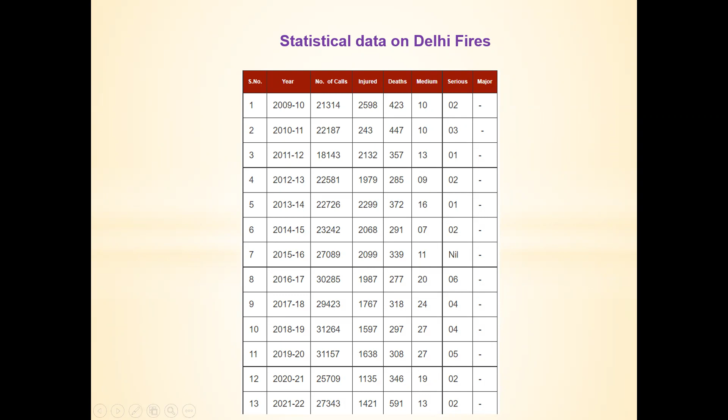As per NFPA, the National Fire Protection Association, a global self-funded non-profit organization established in 1896 devoted to eliminating death, injury, property and economic losses due to fire, electrical and related hazards, the top fire causes identified have been those related to cooking, heating apparatus, smoking, and electrical issues.

Whatever may be the cause of fire, the cost of a fire accident is loss of life, damage to property, and loss of goodwill of the building because it will earn a bad reputation. At the same time, it also causes environmental pollution.

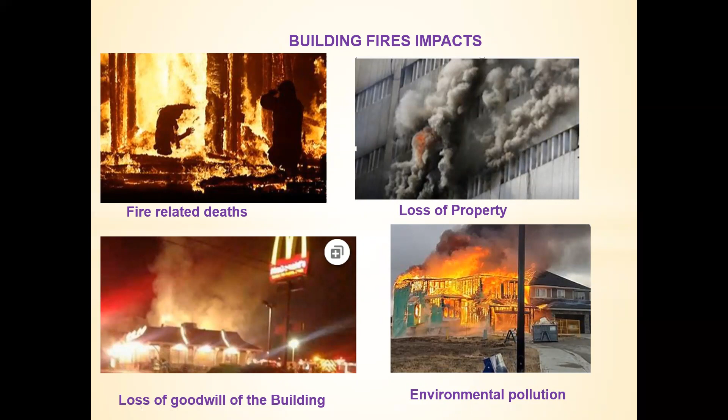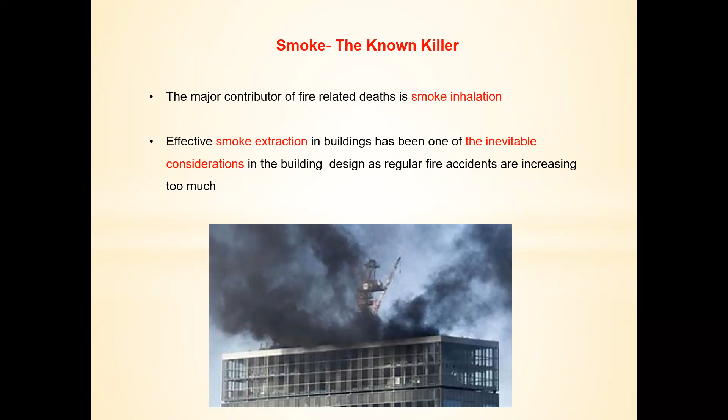It's a well-known fact by now that smoke is a major killer in most fire situations. So smoke extraction is an inevitable part of building design.

So what is so dangerous about smoke in building fires? Smoke kills, that is well known, but the reason why is much less understood. Data reveals that 75% of all fire deaths are caused by smoke inhalation and not the fire.

Approximately 57% of fire deaths have been seen to happen outside the room of fire origin. And around 47% of fire survivors reported that they could not see beyond 12 feet. Why? Because thick smoke reduces visibility, making escape of occupants very slow and hazardous.

The typical speed of smoke is around 1 to 2 meters per second, much faster than the escape speed of an occupant. So when smoke reaches a dead end, vertically or horizontally, it will drop down or be drawn back towards the fire. This confuses occupants and causes them to move towards the fire.

So a properly designed and managed smoke control system is a very important part of building design.

We all know we cannot inhale smoke because of its noxious effects. We know it smells bad, and that's all about it. Fact is, in addition to being chemically toxic, hot smoke can damage skin, eyes, and lungs, leading to disablement. It can obscure vision, hindering the escape of occupants.

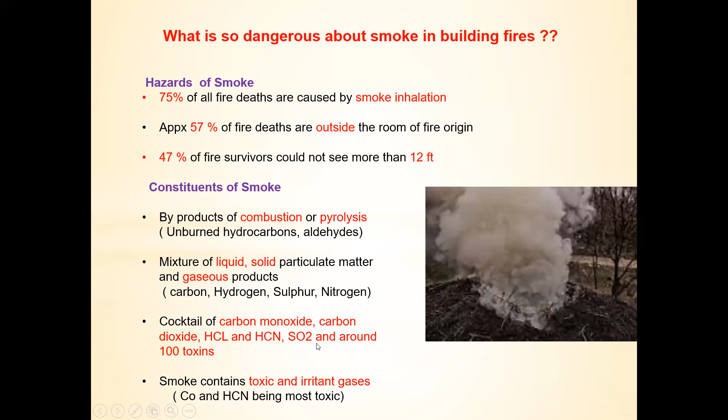What are the other hazards of dangerous smoke? It generates high temperature, and oxygen levels are reduced, causing suffocation to the occupants.

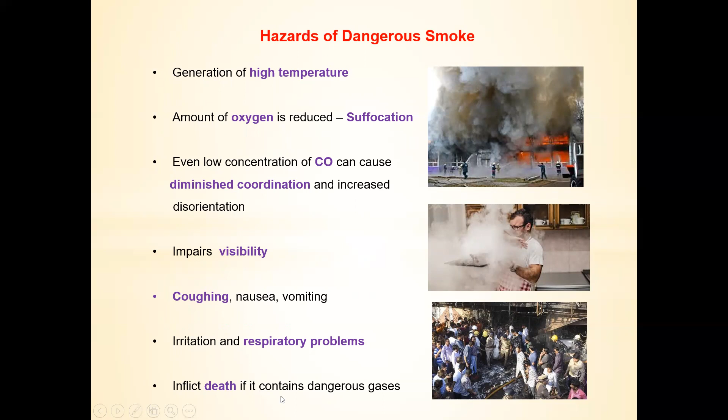Even low concentrations of carbon monoxide in an area can cause imbalance, diminished coordination, and increased disorientation. It impairs visibility, can cause coughing, nausea, and vomiting. It causes irritation and respiratory problems, and can even inflict death if it contains dangerous gases.

So now, what are the applicable and regulatory codes for smoke control and management? The most prominent is IBC, the International Building Code. Then we have NFPA 101.

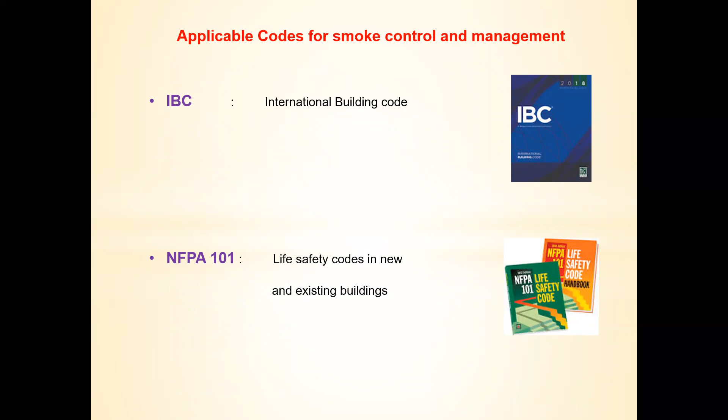NFPA 101 gives the regulations for new and existing buildings. Then we have NFPA 92A, the standard which defines the smoke control system through barriers or compartmentation and by maintaining pressure differentials.

The purpose of these is basically to keep egress routes like stairwells, lift lobbies, and refuge areas free of smoke, and to prevent the travel of smoke from the smoke zone to other adjacent areas.

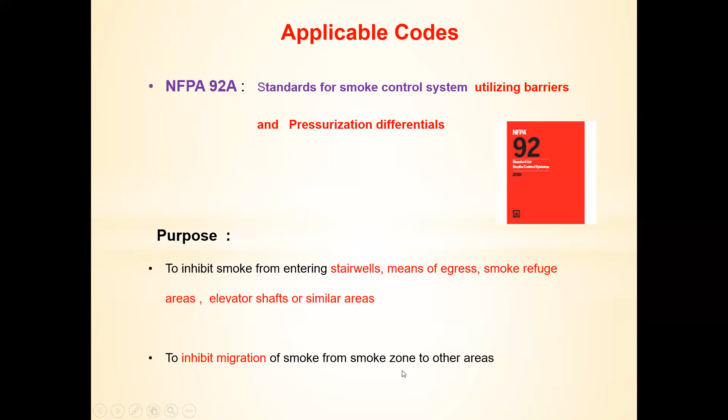There is another standard, NFPA 92B, which is a standard for smoke management systems in malls, atria, and large spaces. The purpose of this standard is to maintain a tenable environment in the means of egress from large volume building spaces. What is meant by tenable environment?

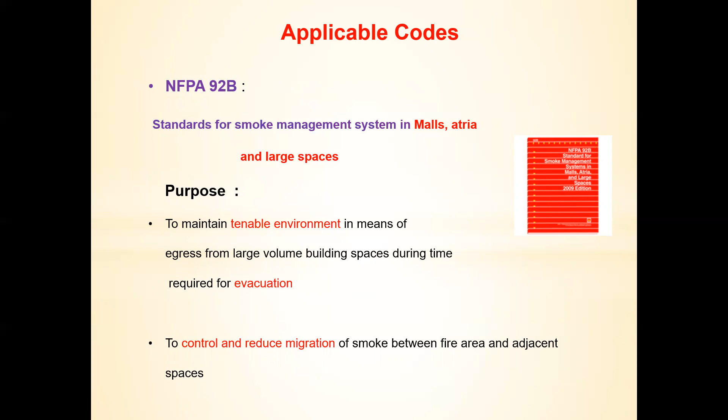Tenable means that the conditions in terms of temperature and concentration of contaminants are within permissible limits and are not life-threatening. Another purpose of the guidelines from NFPA 92B is to control and reduce migration within the affected fire zone and prevent smoke transfer between the fire area and adjacent spaces.

If we compare NFPA 92A and 92B, the airflow patterns are opposite. While 92A seeks to move outside air into enclosed spaces to keep them pressurized and free of smoke, they also have to provide exhaust relief, because constant addition of air can cause excessive pressurization, causing problems in door openings.

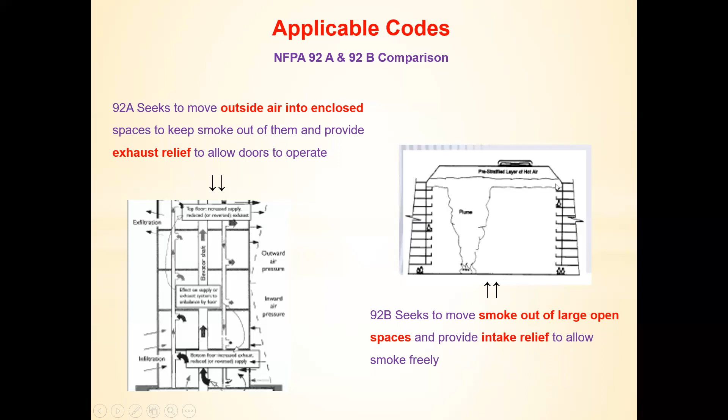92B seeks to move smoke out of large open spaces. So it takes care of exhaust and provides intake relief to allow the smoke to be released freely. Here they're talking of introducing makeup air, which mixes with the contaminants, and the smoke can then be eliminated from that space.

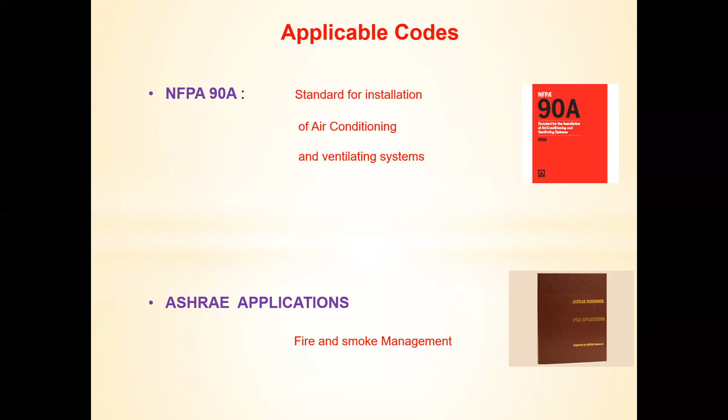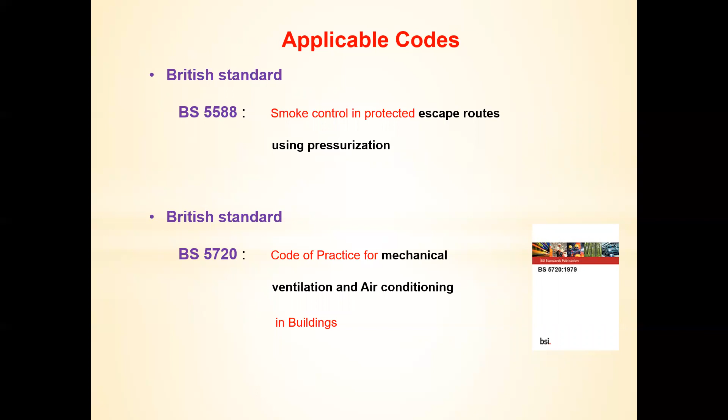Then we have the standard NFPA 90A, which is a standard for installation of air conditioning and ventilation systems. ASHRAE applications, chapter 54, also addresses fire and smoke management. We have British standard BS 5588, which defines smoke control in protected escape routes using pressurization. British standard BS 5720 is a code of practice for mechanical ventilation and air conditioning in buildings.

Then in India, we have NBC 2016, part 4 of which defines fire and life safety. This standard was first published in 1970, and based on experiences—because every fire incident teaches a new lesson—it has been revised over the years in 1983, 1997, 2005, 2015, and the latest one is NBC 2016.

In any high-rise building, stairs are typically the main route for egress of occupants during a fire. So it is imperative for the exit stairs to be free of smoke so that occupants can escape safely.

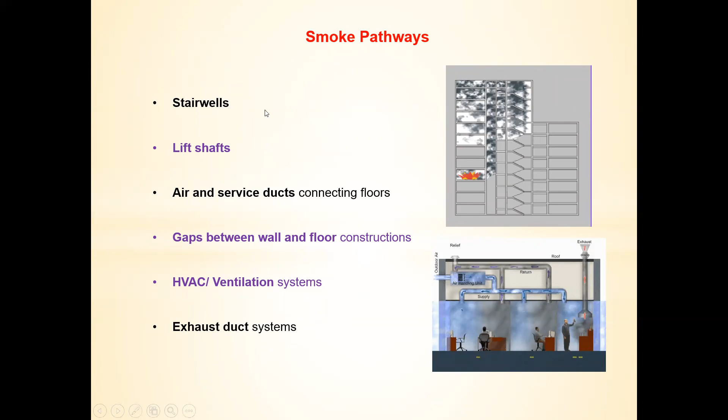Now, how does fire travel in a building? What are the pathways of smoke in a building? These are your stairwells, lift shafts, and also the structure between wall and floor construction, because wall and floor construction is also permeable for smoke to get transferred. Then we have mechanical HVAC and ventilation systems, and exhaust duct systems. All these places provide pathways for smoke to travel.

What are the objectives of smoke extraction? The most important being life safety, and to reduce damage caused to property. Firefighters also, while controlling the fire, need to access the building, so smoke removal is important from that perspective also.

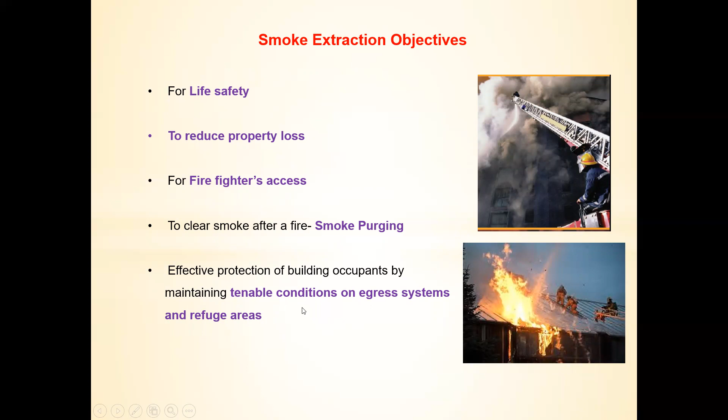After the fire has happened, smoke purging is also required, and for that purpose the smoke management systems are required. The objective of smoke extraction is also to maintain tenable conditions in egress systems and refuge areas, so that occupants can escape safely.

There are various methods of smoke management, classified broadly into two parts: active and passive methods. The passive method uses building construction material to limit the spread of smoke in a structure by maintaining compartmentation, creating fire-rated walls, barriers, fire dampers, smoke vents, and shafts. These use the building systems.

Then we have active methods, which use mechanical equipment to control the spread of smoke in a structure. These are further classified into different forms like exhaust, dilution, airflow, and pressurization systems, among others. The subject is vast, but in this session we'll concentrate only on the last point, D, of the active methods, which is the pressurization system.

Now what is the requirement of pressurization? The International Building Code recognizes three specific means to provide smoke control. One is natural ventilation, where certain openings can be left, as NBC 2016 has also said—you can provide a 0.5 square meter opening in staircases which are exposed to the outside.

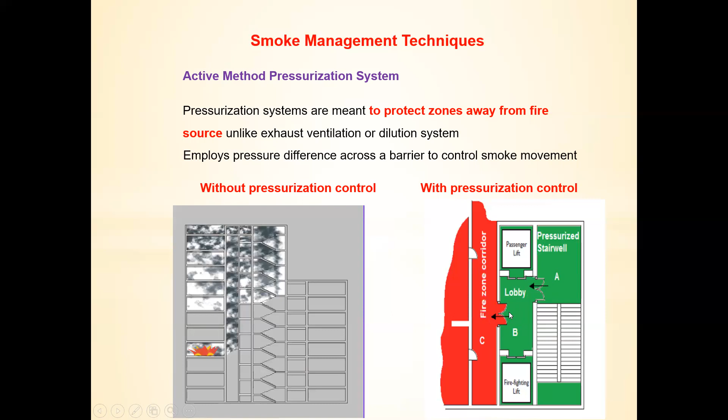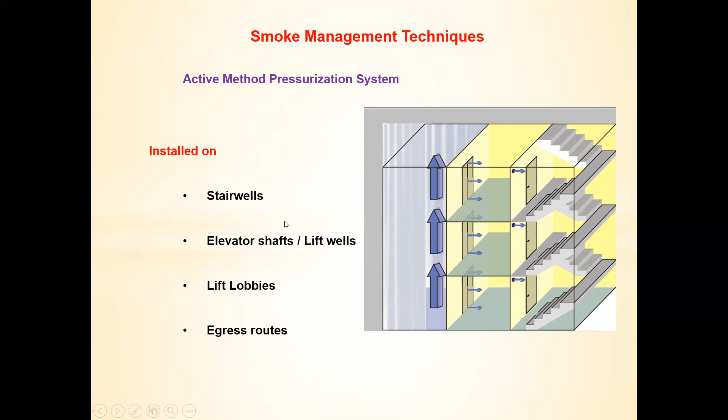This active method pressurization system is installed on stairwells, it is installed on elevator shafts or lift wells, it is installed on lift lobbies and the egress routes.

What are the specific needs of staircase pressurization? Basically to protect life, to reduce damage to property, to inhibit migration of smoke to stairwells and areas of refuge and similar egress areas, to maintain a tenable environment in the refuge areas and egress routes, and to facilitate fire and rescue operation after the fire has happened.

You have to improve visibility to purge out the smoke and for protecting the occupants. So it will ease out the work of the firefighting crew.

This is the typical staircase pressurization shaft diagram. In case of fire, staircases will be the normal route. The people will be escaping from their respective floors to the main outside door.

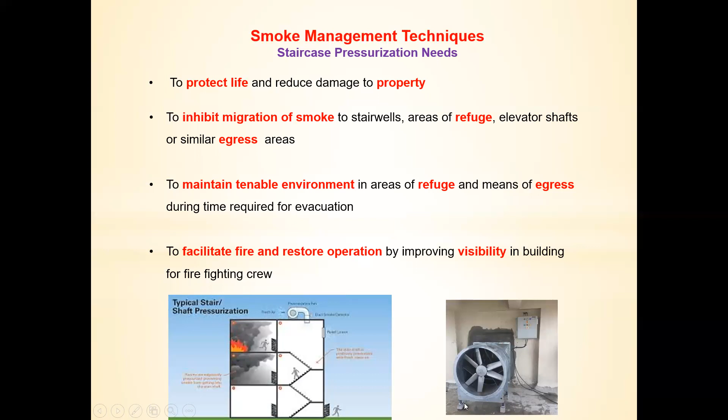This figure shows the staircase pressurization fan, which is normally installed on top of the building, on the terraces. This is a blow-up diagram.

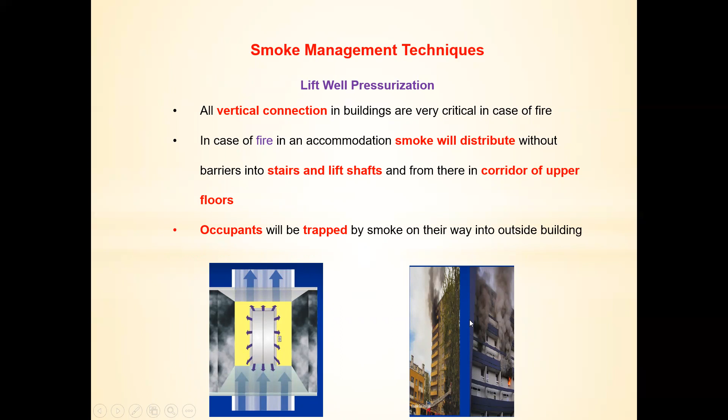The other one is lift well pressurization, because the lift well is a vertical connection. In case of fire, it is very critical because otherwise, if it is not pressurized, smoke will distribute through the stairs and the lift shafts and in the corridors of the upper floors, and the occupants will be trapped by the smoke on their way outside the building.

The NBC says that if the lift lobby is not enclosed in certain buildings, then the lift well needs to be pressurized. Otherwise, the latest code, NBC 2016, has not mandated lift well pressurization. We can do away with this if the lift lobbies are enclosed. Lift well pressurization is an alternative to enclosed lift lobbies.

If lift well pressurization is done, it is maintained at 50 mm static pressure and it prevents smoke flow through lift shafts. But normally, for additional safety in our designs, we provide both the lift well and lift lobby pressurization, with the wells kept at 50 mm static pressure and the lobbies maintained at around 25 to 30 mm static pressure.

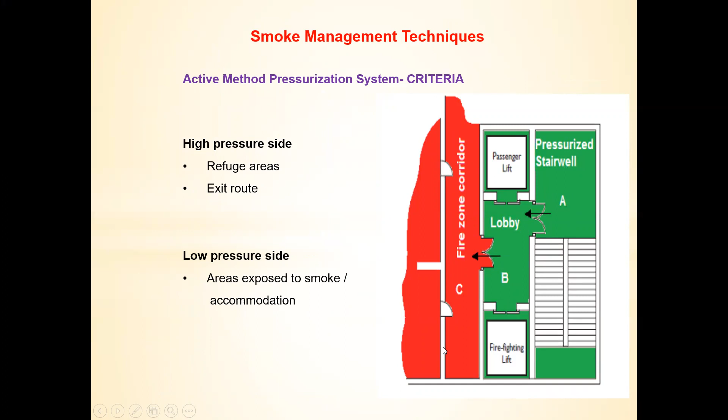So how is this pressurization created? There are two sides: one is the high pressure side and one is the low pressure side. High pressure is maintained in the refuge areas or exit routes like the stairwells and the lobbies, and the low pressure side is the affected accommodation side or the fire zone corridor.

Now, what are the principles, how is it implemented? This system uses mechanical fans to produce positive pressure on the stairwells, on the lift lobbies, and on the lift wells. For example, if we say A, B, C, the pressure gradient which will be maintained will be A greater than B greater than C.

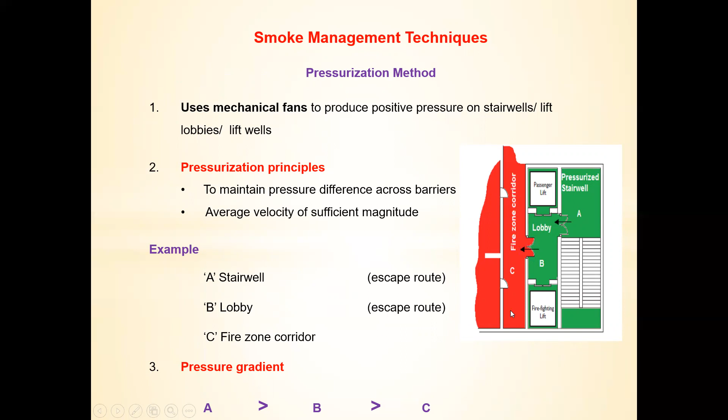The idea being, when these doors are open, the air should flow from A to B to C and not vice versa. This will control the flow of smoke and migration of smoke to the exit routes.

So in the door close scenario, what happens when both these doors are closed? Excessive pressure in A and B will prevent smoke migration from zone C to these places. But at the same time, the caution is that the pressure maintained should not be so high that door opening becomes a problem during egress.

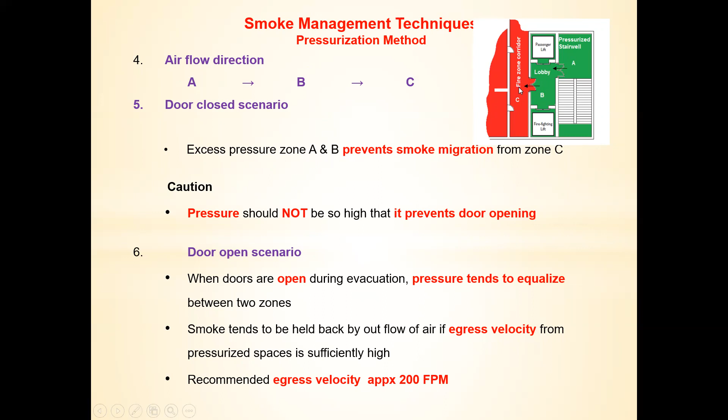The second situation is when these doors are opened. Suppose the door between the affected fire zone, that is the corridor or accommodation side, and the lift lobby is opened. Then the pressure tends to equalize between the two zones. So in the design, provision is kept for this condition: when the door opens, there should be sufficient air quantity so that air rushes across the door at a specified egress velocity of around 1 meter per second, stipulated by standards, or around 200 fpm, and this will prevent smoke from migrating from C to B even when the door is open.

Now there are certain stipulations of NBC 2016 regarding ventilation or pressurization requirements of staircases with respect to the location of the staircase in the building and also based on building heights. For internal staircases with an external exposed wall, if the building height is less than 15 meters, the staircase can be naturally ventilated. This does not apply for residential buildings. The louvered area specified is 0.5 square meter.

For buildings with height between 15 and 30 meters, the stipulation is either the staircase should be naturally ventilated or it can be pressurized. For buildings more than 30 meters, it has to be cross ventilated or pressurized. Cross ventilation means the staircase needs louvers into opposite side walls or two adjacent walls, or it should be ventilated across the corridor.

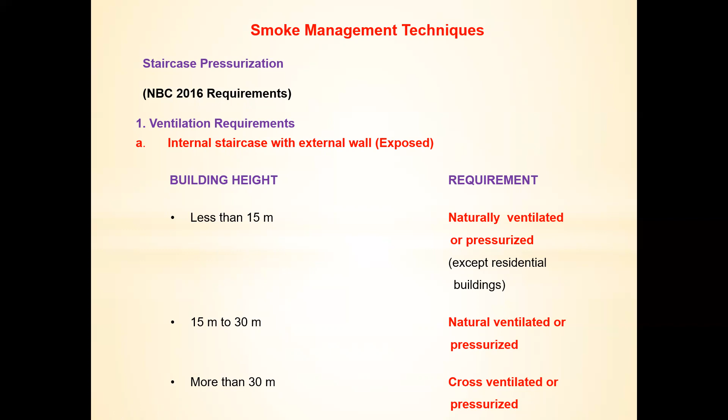The second option is the internal staircase, which is not adjacent to an external wall. For such staircases, for building height less than 15 meters, it's required to be pressurized, and even for higher buildings between 15 and 30 meters or more than 30 meters, the regulations necessitate pressurization. Only residential buildings are exempted from the pressurization requirements.

Now, what about the pressurization levels? As per the codes, the pressurization level in the staircase should be not less than 50 Pascal between the exit staircase and the accommodation. When all the doors are closed, the pressure should be 50 Pascal.

And if there is a smoke stop lobby, an adjacent lobby or lift lobby, then the pressure at the exit staircase should be higher than the lift lobby. So as we saw in the previous slides, if it is 50 Pascal here, it is around 25 to 30 Pascal there. At the same time, the force required to open any door against the combined resistance of pressurizing air and automatic door closing mechanism shall not exceed 110 Newton at the door handle. This is a typical requirement so there is no problem due to excessive pressurization in opening of the doors.

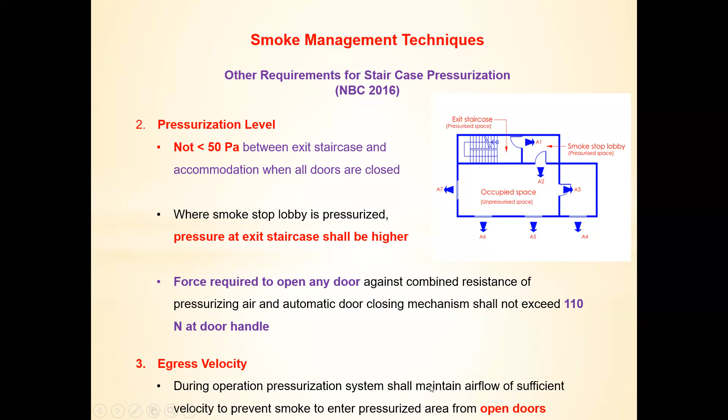Then the third point is the egress velocity. When the doors are open, the pressurization system should provide adequate airflow to enable an adequate air velocity of 1 meter per second from the open door. This flow velocity shall be attained when a combination of two doors from any two successive stories and the main discharge door are open. So NBC says that when designing the pressurization system, it should consider two doors and one main discharge door. But certain standards even accept one door considered as the open door, and the main discharge door in any case has to be open for escape of the occupants. The egress velocity minimum should not be less than 1 meter per second.

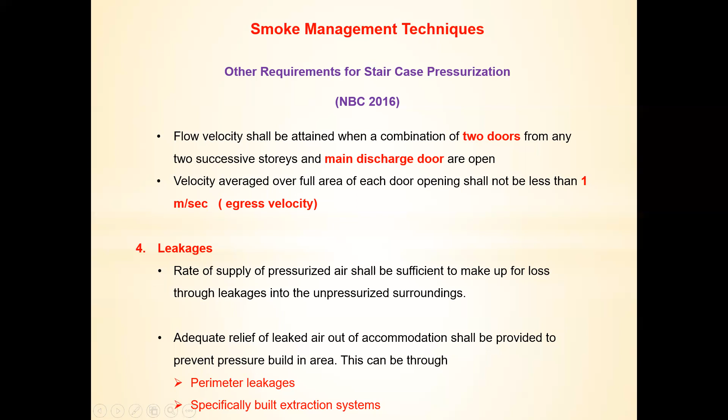Then, as I said, there are leakages through the structural elements in the building. The pressurization air should be sufficient to make up for the loss of air through leakages into unpressurized areas. Now where are these leakages happening? These can be around the perimeter. If we consider a room, there are doors and windows, so there are leakages across doors and windows, and also across the building structure: the walls, the ceilings, the floors. And if there are special extraction systems, those also have to be taken into account.

Then in the design, we have to decide the number and distribution of injection points. If it's a multi-storied building, at which points we need to inject the pressurization air. At the same time, the pressurization system, since it operates during an emergency, has to be fed through a reliable emergency supply. It is a requirement that the supply has to be drawn directly from the outdoor space. Sometimes people tend to consider fresh air coming from basements, but that is not acceptable.

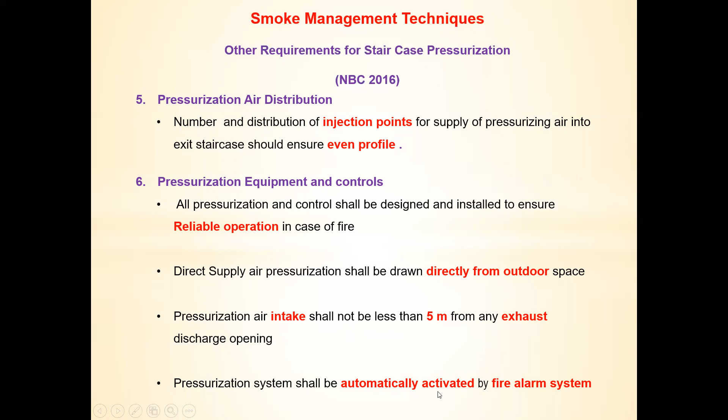As per the regulations, the air has to be drawn directly from the ambient, and the pressure air intake shall not be less than 5 meters from any exhaust discharge opening. The pressurization system shall be automatically activated by the fire alarm system.

As per NFPA 92A, it also stipulates the pressures depending on the ceiling height in sprinklered or non-sprinklered buildings. For a sprinklered building, for any ceiling height, the design pressure difference should be minimum 12.5 Pascal. For a non-sprinklered building with a ceiling height of 9 feet, you need to design for 25 Pascal static pressure. For a non-sprinklered building of 15 feet height, the design pressure difference should be 35 Pascal. And for a high-rise building which is not sprinklered, you still need to maintain a higher pressure of 45 Pascal. So the minimum pressure value in a sprinklered building is 12.5 Pascal.

Maximum pressure value which is allowed is 112 Pascal, because beyond that the door openings can be a problem. Generally the pressure is around 88 Pascal, and door opening force is specified to be 30 pounds.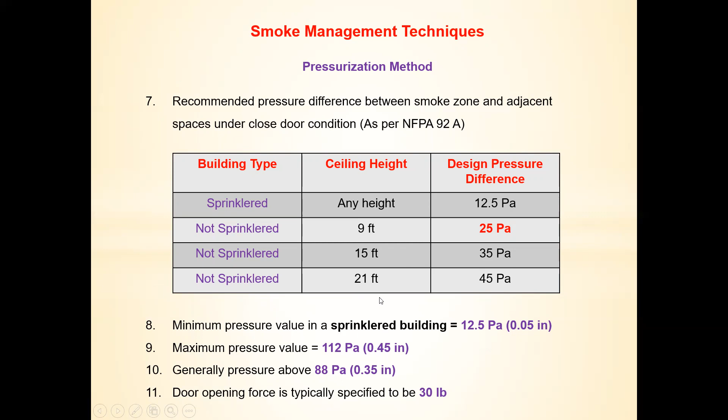Now, what are the system components of the staircase pressurization system? First, we have to decide the supply air quantity, the air which is to be injected into the area which is to be protected. Then we have to provide for the relief air mechanism to avoid or release overpressure when the doors are closed. System components also include the supply fans, the distribution system like ducting, grills, vents, and for the relief mechanism, automatic air release vents or dampers. Then we have the automatic control systems which will actuate the pressurization system, including fire alarms, smoke detectors, and safety switches.

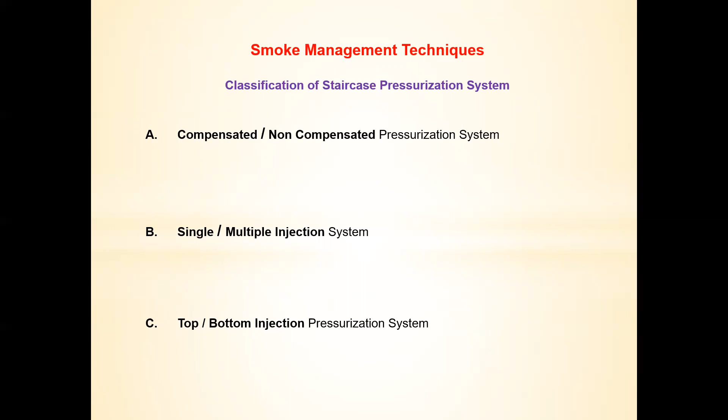There is also classification of staircase pressurization systems. They can be classified as compensated or non-compensated pressurization systems, single or multiple injection systems, and top or bottom injection pressurization systems.

A compensated system is the type of system which can adjust to any number or combination of door openings. So as we are assuming one or two door openings, in a compensated system, any number of doors, if they are open in the building, the system should be able to pour in that extra air to maintain the pressure differentials. It works by modulating the airflow, and at the same time, if excessive pressure is built up, it will relieve that from the stairwell.

But the thing is, this system is more complex and costly. It has more components like sensors, relief dampers, VFDs, and certain control sequences have to be worked out for how these will be operated optimally.

The non-compensated systems are the normal systems used in buildings. They comprise a single speed fan, which is a constant volume fan. Here we decide how many doors will be designed as open. So the level of pressurization depends on the number of doors open, because if the door opens, the pressure in the stairwell will drop, whereas if the door closes, pressure in the staircase will rise.

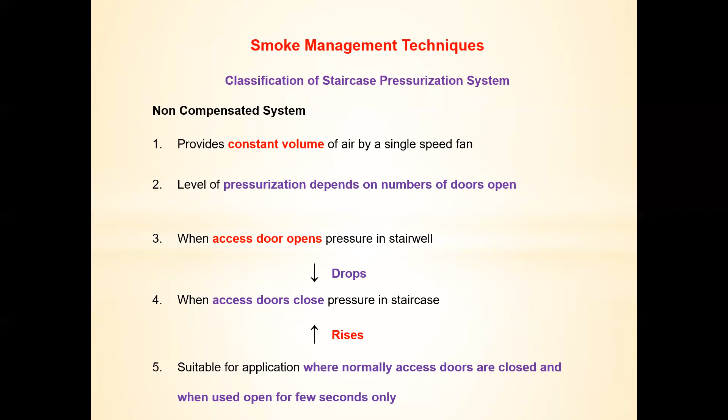This type of system is more applicable for situations where the access doors are normally closed, and whenever used, are open for only a few seconds. Normal office high-rise buildings also experience the same situation.

If the door is opened at the upper floor only, the air is going to leak out into that particular floor, and the balance areas will remain unpressurized. Loss of pressurization will happen immediately at the access doors farther from the injection point. The lower floors will not receive the pressurization, and the most common injection point is the top of the building, where the fan is installed on the terrace.

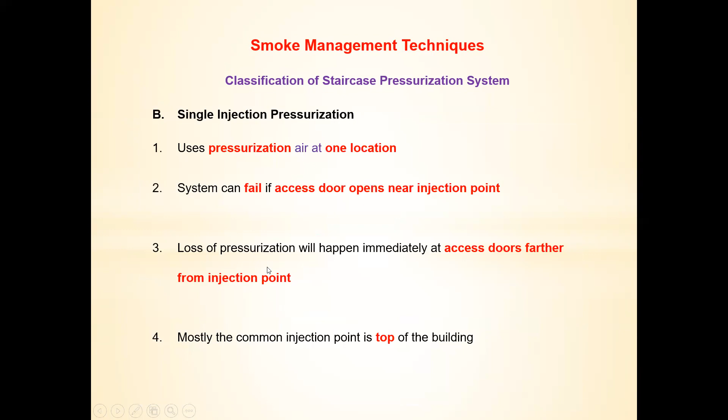Then we have the multiple injection pressurization system, which supplies air from more than one location. We need to have a vertical duct, and the air is injected at different levels. It employs either multiple fans, where you can have a separate fan for one, two, or three floors, or a single fan connected through a ducted arrangement to the multiple outlets.

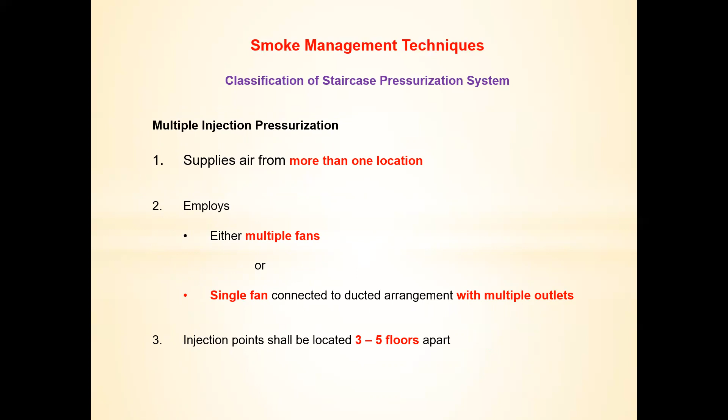Normally acceptable practice is to inject the pressurization air after every three floors, with a maximum of five floors. But in normal designs, we recommend that when laying the duct, we provide the pressurization at every landing.

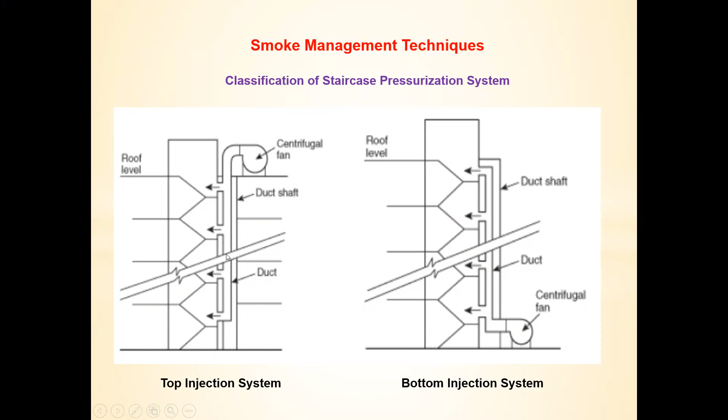Based on the location of the pressurization fan, the pressurization system is classified as the top injection system or the bottom injection system. What is the difference between the top and bottom injection, and what are their merits and demerits? In the top injection system, the fan is at the top of the stairs and occupies minimum footprint.

It will not block the premium space. But the drawback is that the highest pressure will be at the top of the stair and lower pressure at the bottom. Security is also a concern because normally the fans will be in the open.

In the bottom injection system, the fan is at the bottom of the stair and it takes up valuable ground space. As we go up the floors, the pressurization level will be reducing at the upper floors, with higher pressure at the bottom. Security is relatively less of an issue.

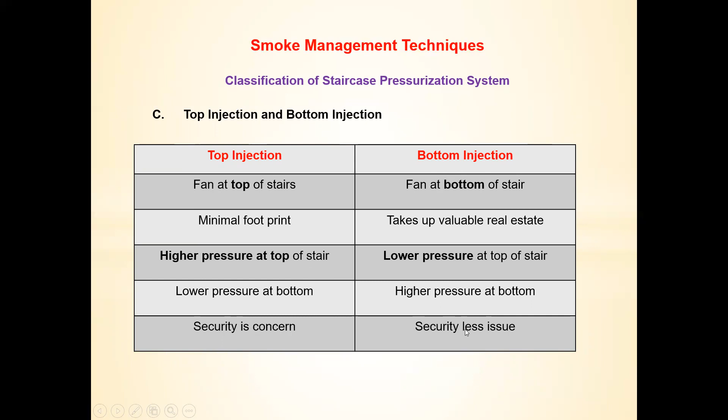Now, how do we go about designing a staircase pressurization system? We need to consider points like: supply fan options, where to locate the fan, how to select the fan drive, how the pressurization fan will be activated, what the distribution arrangement of the pressurization air will be, and what the specification of the ductwork will be.

We also need to design for pressure relief venting, determine the design calculations and design criteria, and understand how the system works. Documentation must be kept handy with the building at all times, since regular fire drills and inspections are an important part of building maintenance. One needs to maintain the basis of design and documentation.

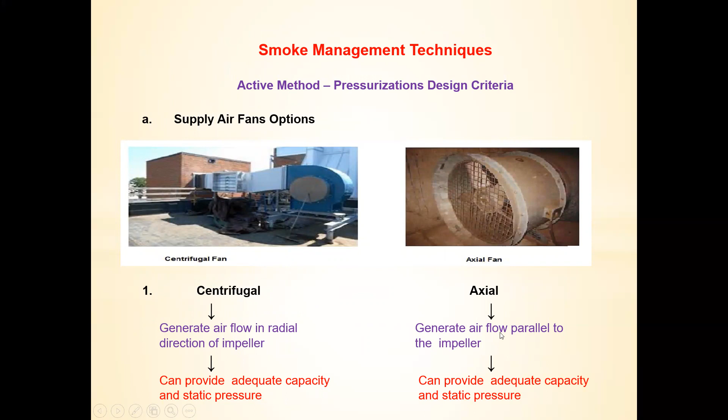Coming to the first point, we have two options for supply air fans: the centrifugal fan or the axial fan. In a centrifugal fan, the airflow is in the radial direction of the impeller, and it can provide adequate capacity, airflow, and generate adequate static pressure too. In axial fans, airflow is generated parallel to the impeller, and this fan can also provide adequate capacity and airflow at the desired static pressures.

So which is preferred, a centrifugal fan or an axial fan? The axial fan is preferred because of its characteristic curves. Axial fans have relatively flat pressure curves, so with varying flows, like when doors open or close, they respond quickly without changing the airflow capacity and without major pressure fluctuations. They are also easy to install, occupy less space, and are usually less costly.

But the drawbacks are that they are affected by wind pressure and may require wind shields at the air intake, particularly when wall mounted. However, since fans for staircases are normally mounted on the roof, they are generally mounted with the axis of the impeller perpendicular to the direction of the wind, so the problem of wind pressure is less severe.

Regarding fan location, whether top or ground, the top location is preferred because the ground level will have the single main entry or exit door, which will be open during a fire. If the pressurization fan location is near that door, it can be disturbed by movement of people due to fire personnel entry or refuge escape operations, which will cause short circuiting.

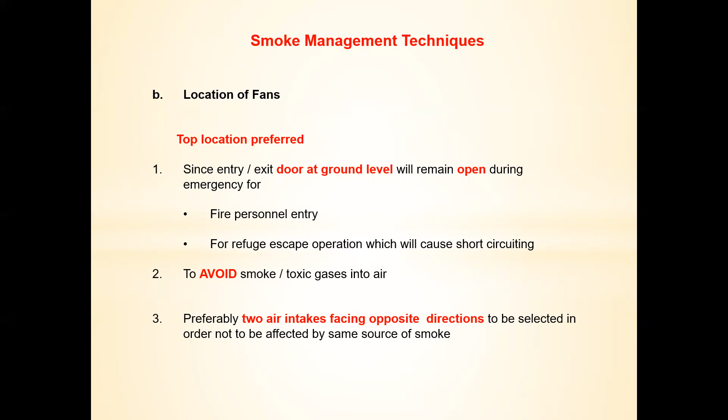If a fire zone happens to be nearby, we need to avoid smoke and toxic gases entering the air supply. So it is preferable to locate the fan on the terrace at the top. Regulations suggest using two fans with air intakes on the terrace facing opposite directions, so that if there is a fire at the top, the pressurization air being sucked by that fan should not bring in smoke—this is sensed by a smoke detector installed in the system. As per the norms, each air intake shall be protected through a smoke control damper, so that if one damper closes due to smoke contamination, the other air intake supplies air without interruption.

And each inlet shall be suitable for providing the full capacity.

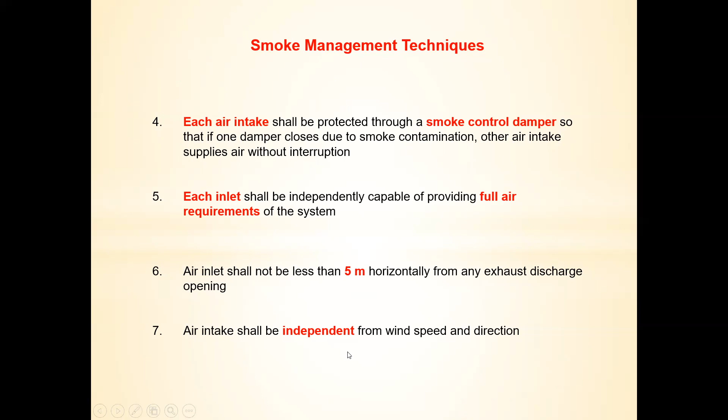It should be designed for the total pressurization quantity and not 50-50. The air inlet shall also not be less than 5 meters away from any exhaust discharge opening. And air intake shall be independent, not influenced by wind speed and direction.

How we select the fan drives: the smoke control fans are required to operate below their rated horsepower, and they should be selected with a service factor of 1.15. They should be designed to run in the stable portion of the fan curve so that the air quantity is not modulated much due to the pressure differentials when the doors open. They should be suitable for operation at elevated temperatures, which is why it has been specified that the fans should be able to withstand 250 degrees centigrade for more than 2 hours.

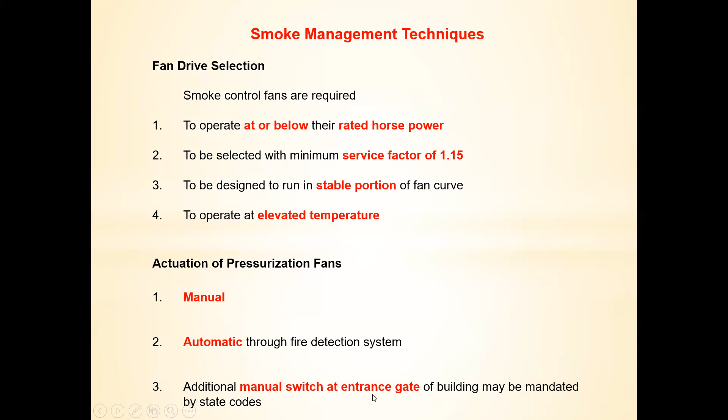How will the pressurization fans be actuated? The actuation can be manual or automatic through the fire detection system. Additionally, certain state codes also mandate that there should be a manual switch at the entrance gate so that people don't have to go in to switch on the system.

How will the distribution arrangement, the ducting arrangement, be designed? It can be a single fan serving a vertical duct, providing horizontal branches to each floor, or it can be multiple fans serving multiple floors.

Now, how can the location of the vertical duct be placed? It can be placed in a dead area or a non-critical area in various configurations depending on the building and core layout. For example, this picture shows a pressurization duct, a shaft supplying the lift lobby and staircase, with the shaft designed within the toilet.

In this case, if we are not getting the face of the staircase or the lobby, you can have it inside, but then the connection has to be through a fire rated duct. This has to be a fire rated duct supplying pressurization air to the lift lobby.

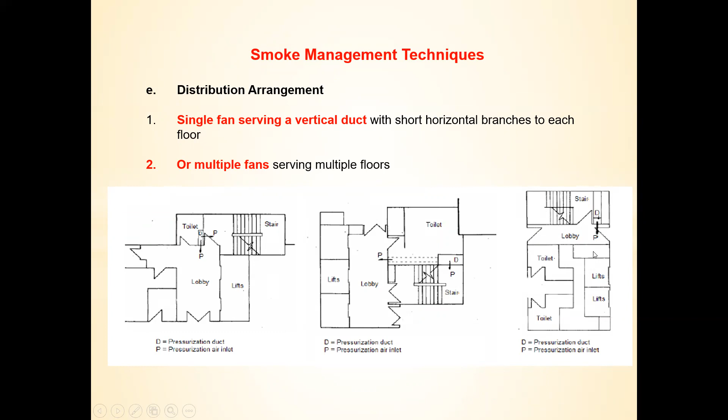In certain cases, a preferable option is to have a backside shaft in the stairwell itself. We can have a masonry shaft in which the pressurization ducts can be laid for the staircase as well as for the lift lobby. This is a blow-up showing the 3 configurations.

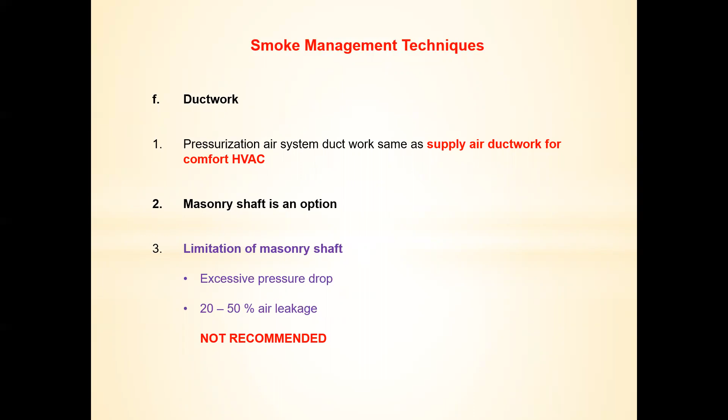Coming to the ductwork specifications for pressurization: the pressurization system ductwork can have the same specifications as normal comfort HVAC, and you can also pump air through a masonry shaft, but it is not a very good option. One, it causes leakage because of the permeable structure. It causes excessive pressure drop, and if it is a high-rise building, you cannot give the cross-sectional change which will determine the proper velocity at the lower levels. So we do not recommend the use of a masonry shaft.

Then how do we design the pressure relief venting? This is to prevent the build-up of excessive pressure in the stair when the doors are opened and closed. When the door is opened, the pressure in the stair reduces and the relief vent closes. When the door closes, the vent will open to release the excessive pressure developed in the stair, so that the door opening forces are reduced.

What are the different mechanisms of relief methods? One is the automatic opening door: when excessive pressure builds up in the corridor, you can have electrical interlocking connected with the differential pressure sensor in the staircase, causing automatic opening of the door. But the limitation or drawback of this method is security. You can provide vents at each floor to relieve the excessive pressure, and you can have barometric dampers.

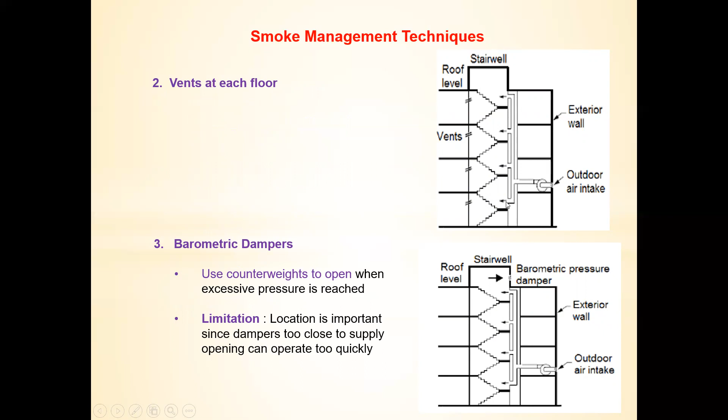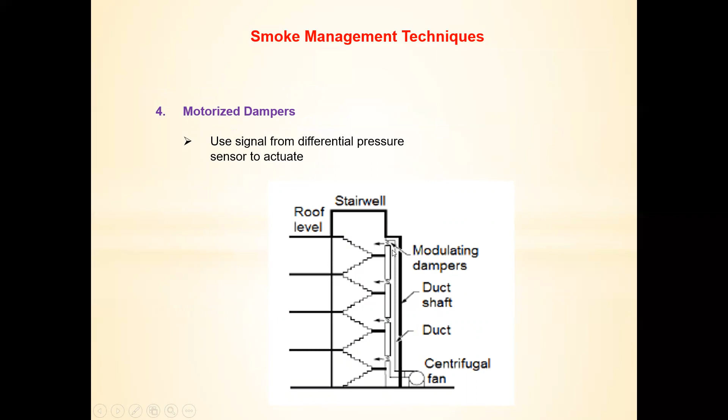You can also have motorized dampers, which take a signal from a differential pressure sensor between the stairwell and the accommodation, and accordingly release some air into the stairwell. We can have exhaust fans to relieve the excessive pressure, or reduce the pressurization by bypassing some amount of air across the fan itself. Another option is to have a variable frequency drive for the fan, which can modulate the air quantity based on the signal from the differential pressure sensor.

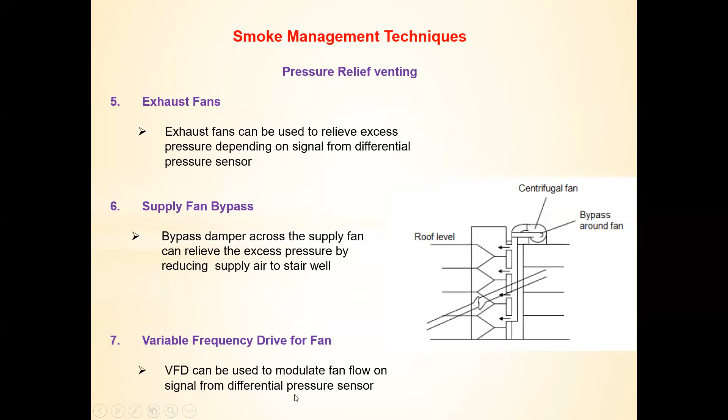Now coming to the design calculations in detail, we need to know the minimum pressure difference allowed between the staircase and the adjacent accommodation, denoted Delta P minimum. As per NFPA 92A, table 5.2.1.1, it specifies a minimum pressure of 0.18 inch or 45 Pascal between the staircase and the adjacent accommodation.

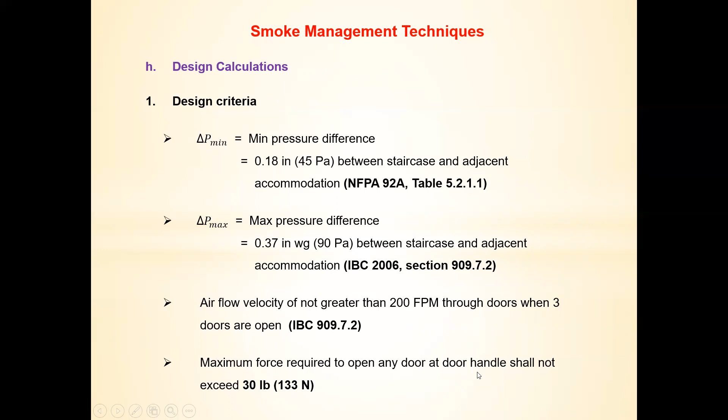The delta P maximum, the maximum pressure difference between the staircase and adjacent accommodation, is mentioned to be 0.37 inch water gauge or 90 Pascal. When doors are open, IBC calls for 3 doors open, air velocity of not greater than 200 fpm through the doors, so around 1 meter per second is the egress velocity specified across the door. And the maximum force required to open any door handle should not exceed 30 pounds.

So how do we go about designing the pressurization air quantity? Seeing the layout of the building, we need to identify all the airflow paths from where the leakages are bound to happen. We calculate the leakage rate at each of these elements. Then we identify all the airflow paths with the doors closed, and calculate the leakage rate for the gaps around the doors or windows.

We also give a contingency and increase the air quantity by 50% for the unknown leakages. Then we identify all the open doors and see what air quantity is required to be added in the pressurization calculation when the door is open and the air has to rush from the door at a velocity of around 200 fpm, and maybe 15% can be added also to take care of the losses to the ducts.

Calculate the total airflow with all the balance doors closed and only 3 doors open, one main ground floor escape door and 2 doors on any successive stories of the building, and determine the fan capacity. Check that the door opening forces are below 30 pounds.

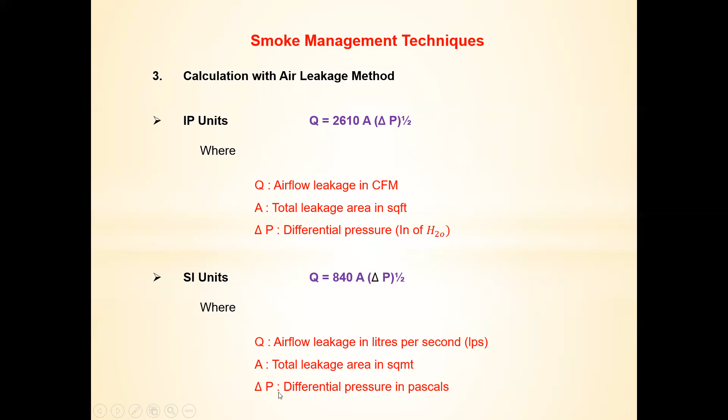So total airflow requirements can be computed as Q total is equal to Q1 plus Q2 plus Q3, where Q1 is the leakage through gaps in the building construction. As I said, there will be leakages through the walls, through the ceiling, through the floor, because the structure is permeable. Q2 is the leakage around the doors or windows which are there in that particular area. And Q3 is the air quantity which is required to take consideration of the open doors.

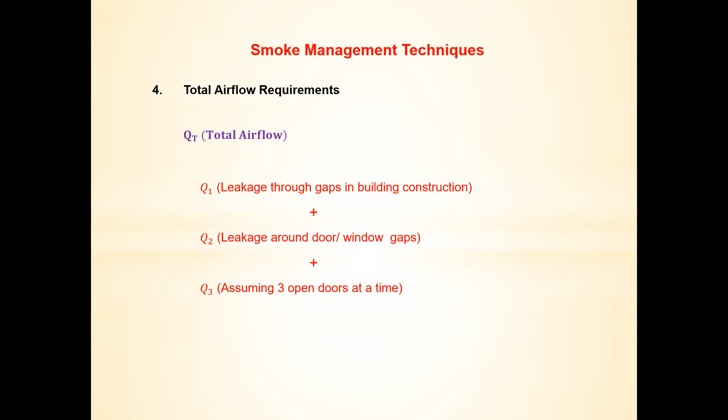This is a table available in NFPA 92, which gives, based on the tightness of the building, how much will be the leakage area depending on the construction elements. Say, for stairwell walls, for average tightness, the leakage area is 0.11 into 10 raised to power minus 3 square meter. For elevator shaft walls, if it's average construction, the leakage area is 0.84 into 10 raised to power minus 3 square meter.

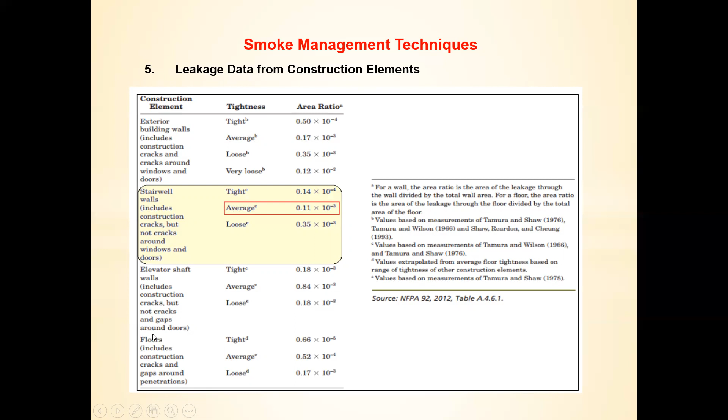Similarly, for the floors, which includes construction cracks and gaps around the penetrations through which the leakages happen, for average construction, average tightness of the floor, the leakage area is 0.52 into 10 raised to power minus 4 square meter. The same figures apply for the ceilings as well.

And then if we come to leakage areas around the doors or windows, where are these leakages happening from? These are happening from the perimeter of the doors or windows, that means 2 times the height and 2 times the width, and the crack length - what is the gap, which is normally assumed to be 5 or 6 mm. It also depends on whether it's a single leaf door or a double leaf door. A single leaf door of regular size 3 feet by 7 feet will not have the middle central gap.

The perimeter will be the 2 heights and 2 widths, and the leakage area, for a gap of 6 mm, will be calculated as the total area into this - crack length into gap is 0.12 square feet.

Now for a double leaf door, the crack length is the perimeter plus the central height. So for a 6 feet by 7 feet door, you have 6 plus 6 is 12, plus 7 is 19, plus 7 is 26, plus the central 7 makes it 33 feet, and with the gap of 6 mm, the multiplication of 33 feet by this, the total leakage area for the double leaf door computes to 0.2 square feet.

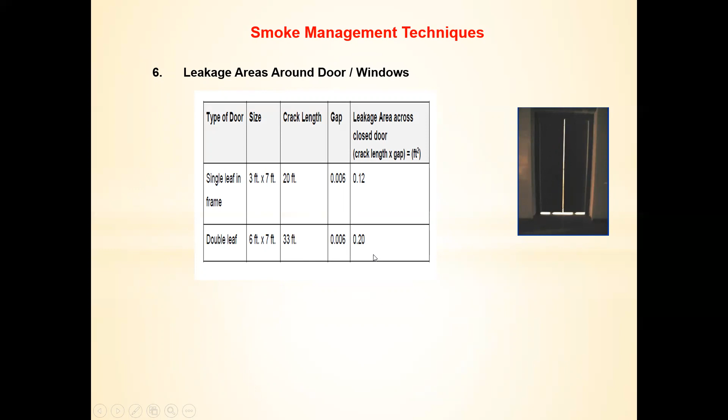Now leakage through the open doors. How do we compute the leakage through open doors? Q is equal to V maximum into A door. Q is the flow rate through one open door in CFM. V is the maximum air velocity, stipulated as per IBC as 200 FPM. A is the effective opening of the door in square feet.

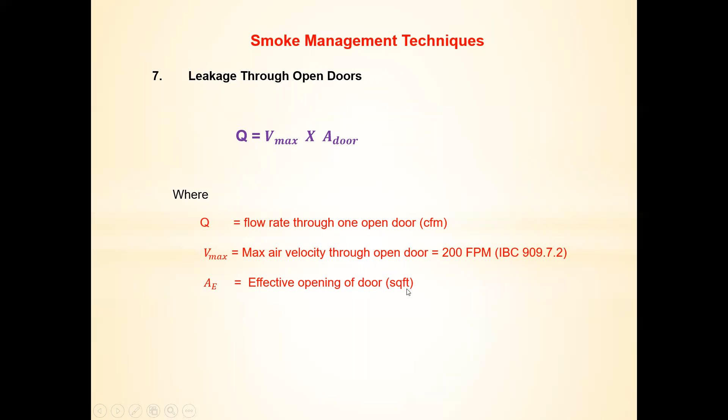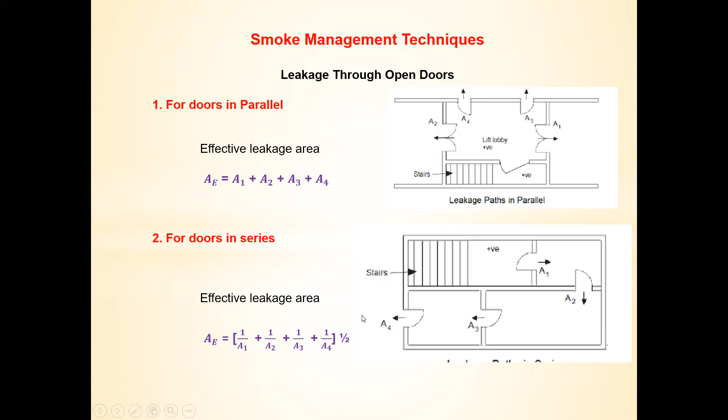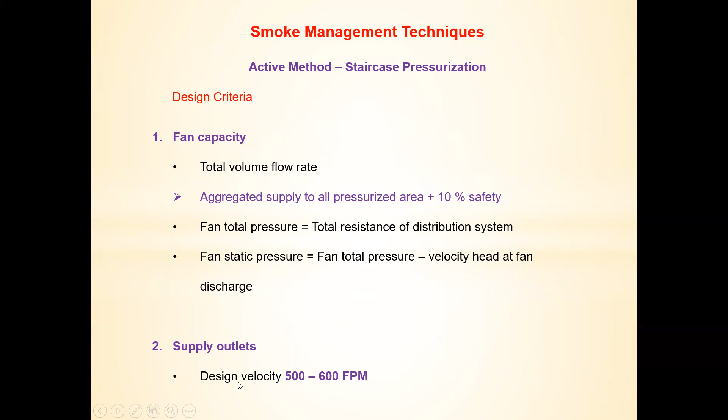This is how we calculate the fan capacity: find the total leakages and total volume flow rate evaluated, which is the total supply to the pressurized area. Add 10% safety to it, find the total pressure of the distribution system, and decide on the fan static pressure to be maintained. The supply outlets, the grills at each landing, are designed at a velocity of 500 to 600 FPM.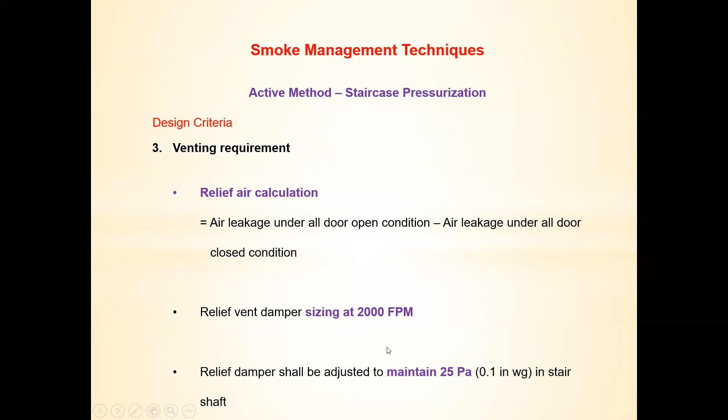Then the venting requirement to provide relief in case of overpressure is calculated by sizing the relief vent damper. For this, we calculate the air leakage when all doors are open minus air leakage when all doors are closed. The difference divided by 2000 FPM gives the square feet of the relief damper required, and it should be adjusted when providing the relief. Minimum 25 Pascal pressure should be maintained in the stairwell, in the stair shaft.

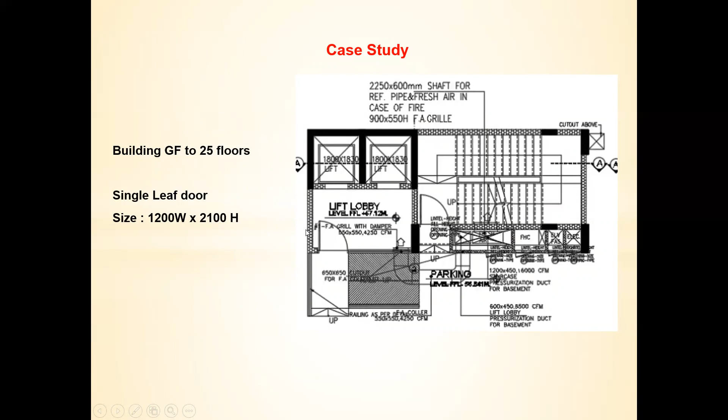So now coming to case studies and the design calculation details, we will take up one calculation each of staircase pressurization, lift lobby pressurization, and lift well pressurization. This is a case of a building extending from ground floor to 25 floors, that means total 26 floors. This is the lift lobby and this is the stairwell. Both have a single leaf door of 1200 wide by 2100 high.

Coming to the staircase pressurization calculation, as discussed earlier, the pressure difference required to be maintained in the stairwell is 50 Pascal. Egress velocity required to be maintained is 1 meter per second. Total number of floors: if the building is from ground floor to 25th floor, there are 26 floors total. The door type is single leaf, and the door size is 1200 wide by 2100 high.

How we calculate the leakage length: it's the perimeter of the door, 2 into W plus H, or 6600 millimeter. The air leakage gap, assumed door crack, is 5 mm. So the leakage area can be calculated as 0.033 square meter, as a multiple of this.

Now, as per ASHRAE 2021, and as per the formula discussed earlier, the leakage flow rate across the closed door works out to 0.839 into A into under root of P into 2118.9, where Q is the quantity of air in CFM, A is the leakage area in square meter, and P is the pressure differential in Pascal.

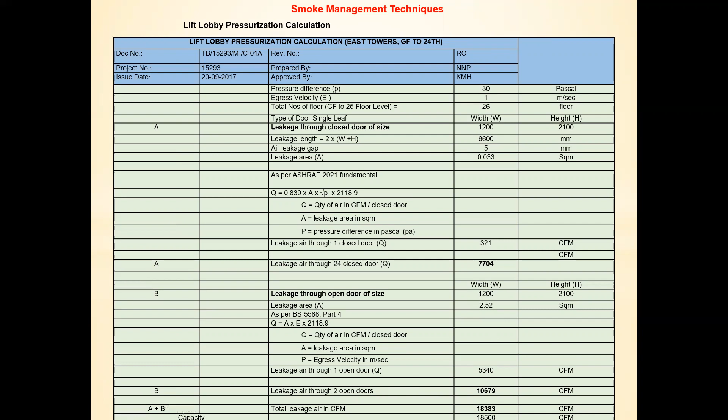So you can select a fan of 18,500 CFM.

This is the third case, which talks about lift well pressurization. As discussed, the pressure required to be maintained is 50 Pascal, and we have total number of floors as ground floor to 25 floors, that is 26 floors.

Here the width of the door taken is 1000 by 2100 high, but it's a double leaf door. So the leakage length is the perimeter plus 1 vertical height, which works out to 8300 millimeter. The air leakage gap is assumed to be 5 mm, and the leakage area is 0.0415 square meter.

So the total leakage across the closed door is again given by the formula Q equals 0.839 into A into root P into 2118.9, where Q is the quantity of air in CFM, 0.839 is the factor, A is the leakage area in square meter, and P is the pressure differential to be maintained.

Putting all the respective values in the formula, we get leakage air through one closed door as 522 CFM. Likewise, we have 26 floors, but in case of lift well, only one door will be considered as open. So leakage air through 25 closed doors will be 522 into 25, which is 13,050 CFM.

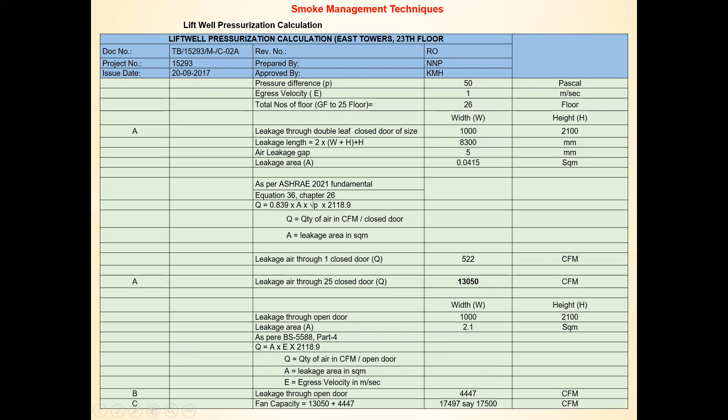That was about the three calculations where we need to provide the pressurization systems. Now this is again a typical example of an office stairwell where we'll be considering all the elements, the leakage through the building structure and through the openings. Here I can just read out the requirement.

Estimate the pressurization requirement for an office stairwell that runs 5 floor levels. So there are 5 floors in the building. Each floor has a height of 17 feet and it is 28 feet wide, meaning this dimension is 28 feet, by 48 feet long. It has 2 single leaf doors of 3 feet by 7 feet and a double egress door of 6 feet by 7 feet.

We have to assume 3 doors are open and the maximum differential to be maintained between the stairwell and the office is 0.37 inch of water. So these are the requirements, and we need to design the pressurization system for the same.

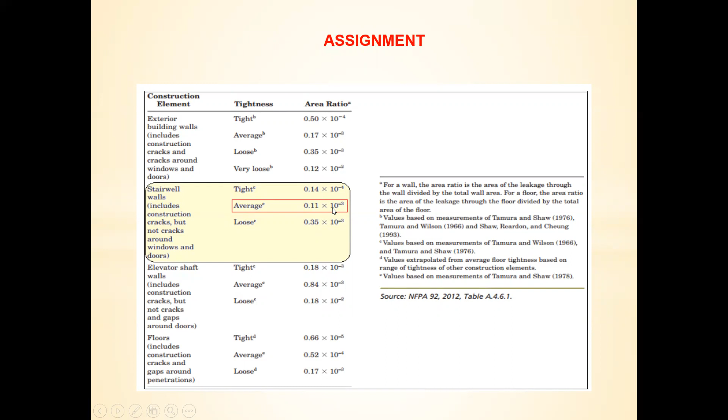Now, average leakage ratio, as we saw in this table, for average construction is 0.11 into 10 raised to power minus 3. So we use the same value. The total leakage area into the leakage CFM, leakage area for the space, becomes 0.28 square feet.

On the floor, the area is 48 into 28. The floor area through which the leakage will happen is 28 into 48, equal to 1344 square feet. And from the same table, for an average construction floor, the leakage area will be 0.52 into 10 raised to power minus 4. Applying this leakage ratio into the floor area, the total leakage area becomes 0.14 square feet.

Likewise, for the leakage from the ceiling, we take the total area as 28 into 48 into the same air leakage ratio of 0.52 into 10 raised to power minus 4. The leakage area is same as the floor, that is 0.14 square feet.

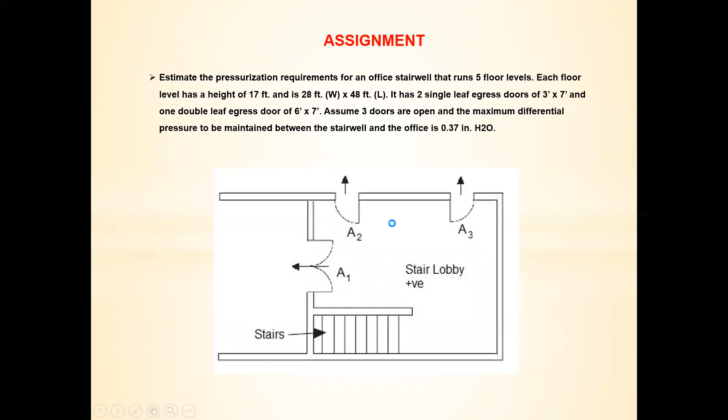Now we have basically three doors, two single leaf doors, A2 and A3. The height of the door is 7 feet and one door is 3 feet, so the combined width is 6 feet. The gap length is the perimeter, 7 plus 7 plus 3 plus 3.

The door crack is assumed to be 6 mm. That means the total leakage area is 0.12 per door, and for two doors it works out to 0.24 square feet.

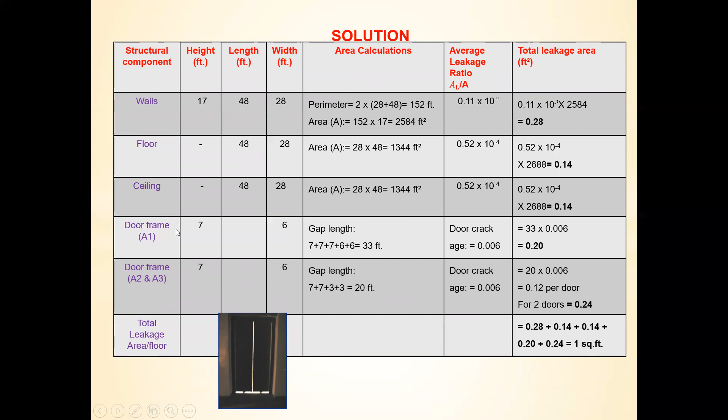For the single leaf door, which is 7 feet by 6 feet wide, the gap length is the perimeter, that is 7 plus 7 plus 6 plus 6 plus the vertical height 7 feet, which is additional. So it is 33 feet. The door crackage here becomes 0.006 and the total leakage area is 0.2 square feet.

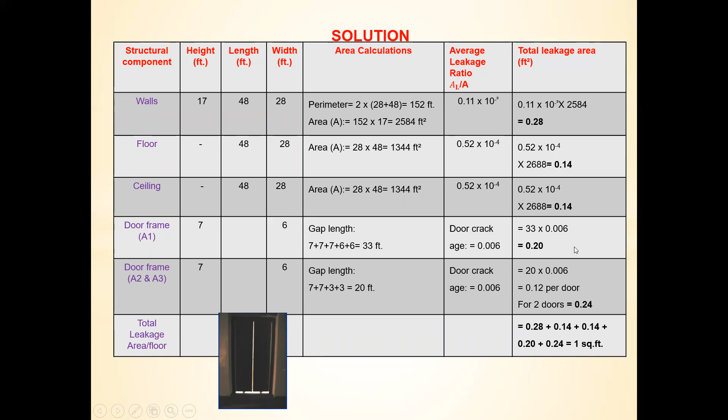So airflow through the gaps in building construction we term as Q1, airflow around the door gaps as Q2, and the total airflow will be given by Q1 plus Q2, given by the formula Kf into A into delta P raised to power 1 by 2, where Q is the leakage CFM, K is the coefficient 2610, A is the flow area, and delta P is the pressure differential to be maintained, which in this case is given to be 0.37 inches of water.

So the volumetric flow rate, the total leakage for Q1 and Q2 for the building construction and the door gaps, becomes 2610 into 1 into 0.37 raised to power 1 by 2, because the flow area is 1 square feet. So it works out to 1587 CFM per floor. So that is for the building structure.

And number of floors of the stairwell are 5. So the total volumetric flow rate, the total leakage through the structural walls, ceiling and the floor works out to 1587 into 5, which is 7935 CFM.

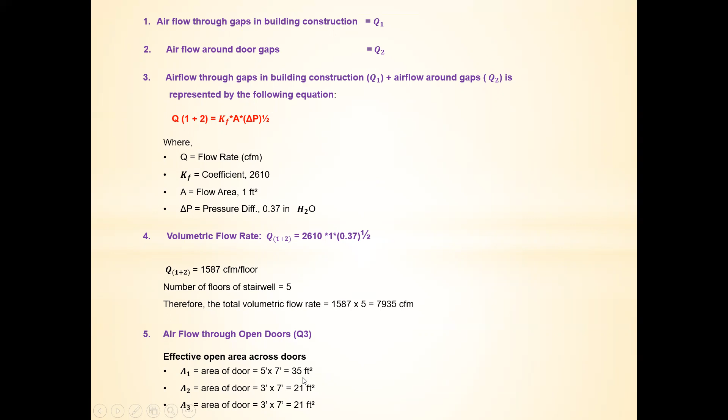Now airflow through the open doors. We are assuming 3 doors to be open. One is 5 into 7, the double leaf door, other ones are 3 by 7, 3 by 7. So the total open area is 35 plus 21 plus 21. Since the doors are in parallel, the effective leakage area is A1 plus A2 plus A3, which works out to 77 square feet.

So the total leakage across the open doors will be V maximum into AE, where V is 200 FPM, the egress velocity, and A is the total leakage area, that is 77 square feet, so that is 15,400 CFM is the leakage through the open doors.

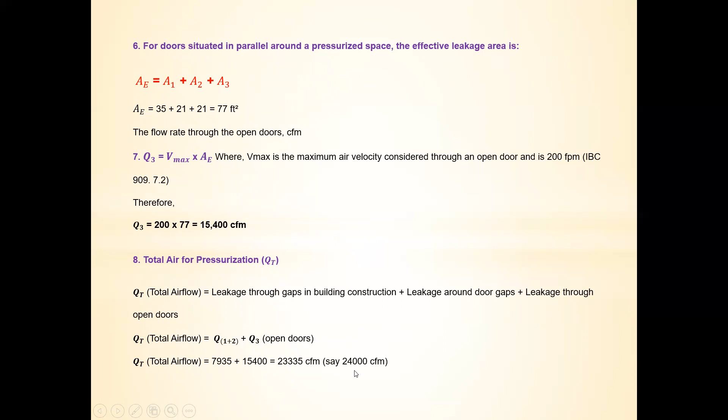So total air for pressurization will work out to the leakage through the gaps in the building construction, leakage around the door gaps, and leakage through the open doors. That is Q1 plus Q2 plus Q3, that is 7935 plus 15,400 for the open doors, that is 23,335, say 24,000 CFM. So this is the capacity of the fan or the pressurization air required.

Now how do we design the supply outlets. This air quantity is to be divided at 5 levels, that means approximately 4,800 CFM at each supply outlet. And we said the grill is to be designed for 500 to 600 feet per minute, that means a cross-sectional area of 4,800 by 600, or 8 square feet grill will be required.

Then we have the venting requirements, how much relief should be provided. That is the air quantity with the 3 doors open, and then considering all the doors closed. So the differential, 15,400 minus 7,935, is the relief air requirement, 7,465, and the pressure relief damper is to be designed for a velocity of 2000 fpm.

So that means we can design it for 7,465 divided by 2000 fpm, around 3.7 square feet is the cross section of the relief damper required.